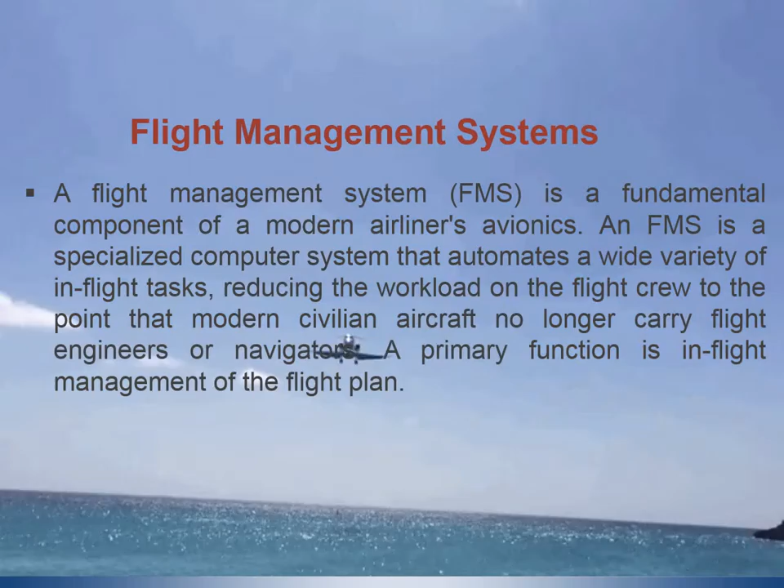Flight management systems play a vital role in aircraft management. A flight management system is a fundamental component of a modern airliner's avionics. An FMS is a specialized computer system that automates a wide variety of in-flight tasks, reducing the workload on the flight crew to the point that modern civilian aircraft no longer carry flight engineers or navigators. A primary function is in-flight management of the flight plan. This means the FMS provides area navigation which earlier was done by engineers and navigators. So the job done by navigators and engineers is now fulfilled by the flight management system, especially managing the flight plans.

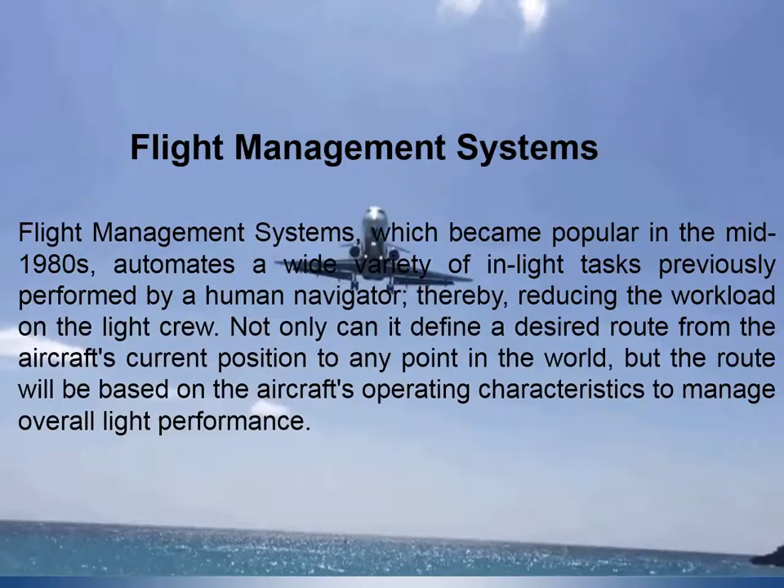Coming to other aspects of the flight management system, it became popular in the mid-1980s because it automates a wide variety of in-flight tasks previously performed by a human navigator, reducing the workload on the flight crew. Not only can it define a desired route from the aircraft's current position to any point in the world, but the route will be based on the aircraft's operating characteristics to manage overall flight performance.

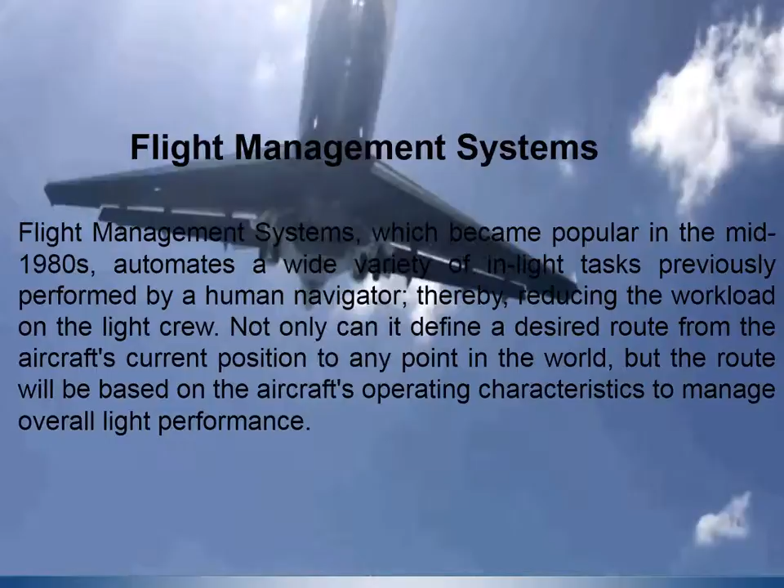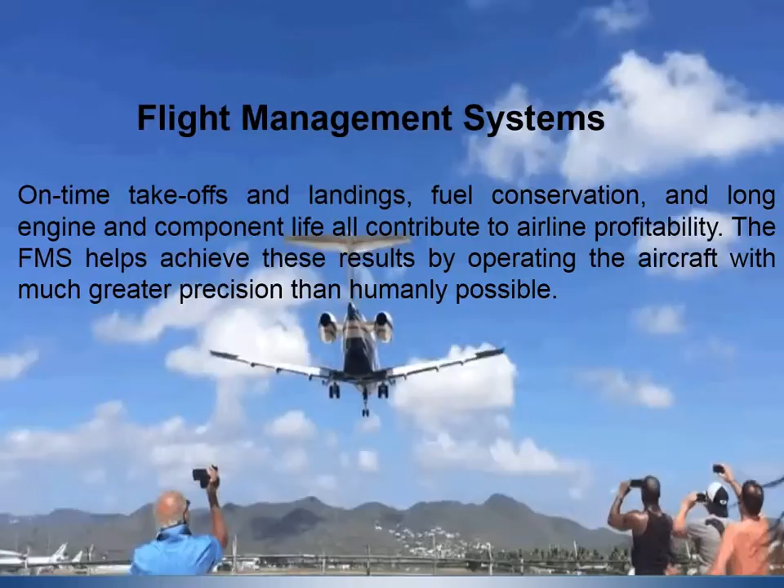Flight management systems provide very vital management, including on-time takeoffs, landings, fuel conservation, and long engine and component lives, all contributing to airline profitability. The FMS helps achieve these results by operating the aircraft with much greater precision than humanly possible. This means during flight, the aircraft flight management system approves the flight plan which is most profitable and economical for the airline.

Flight management systems consist of dual redundant flight management computers and control display units. These flight management computers are sometimes called FMCs, and control display units are called CDUs. During normal operation, the computers crosstalk with each other to share and compare information. Each FMC is capable of operating independently in the event the other FMC fails. However, only one FMC provides commands to the other aircraft systems at any one time.

This means we have dual redundant flight management computers, but at the same time, if both are working, they crosstalk with each other and find the accurate results. But at one moment, one acts as master and the other acts as slave.

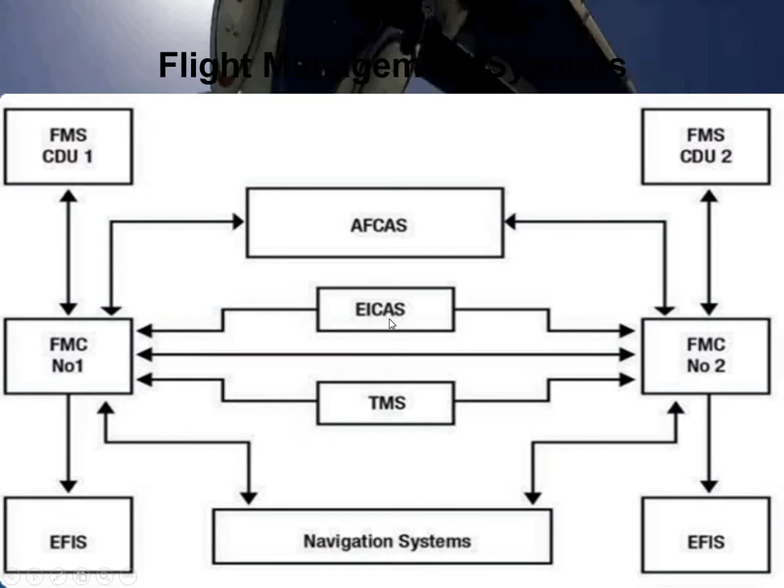At the same time, the FMC has a good interlinkage with the electronic engine indicating and crew alerting system, EICAS, and the thrust management system, and also the auto flight computer. So the FMCs provide interlink with the auto flight computer, engine indicating and crew alerting system, and the thrust management system of the engine. The augmentation of the auto flight computer, the EICAS, and the thrust management system is done on the basis of the flight management computer.

The fourth and major aspect of the flight management computer is its linkage with the navigational systems. These navigation systems provide and receive information from the flight management computer so they can give accurate flight plans and procedures, receiving and transmitting accurate flight plans to the flight management computer. These flight plans are executed by the FMC, but information comes from the navigation systems like VORs, ILS, TACAN, DMEs, and other equipment which provide navigational information to the aircraft.

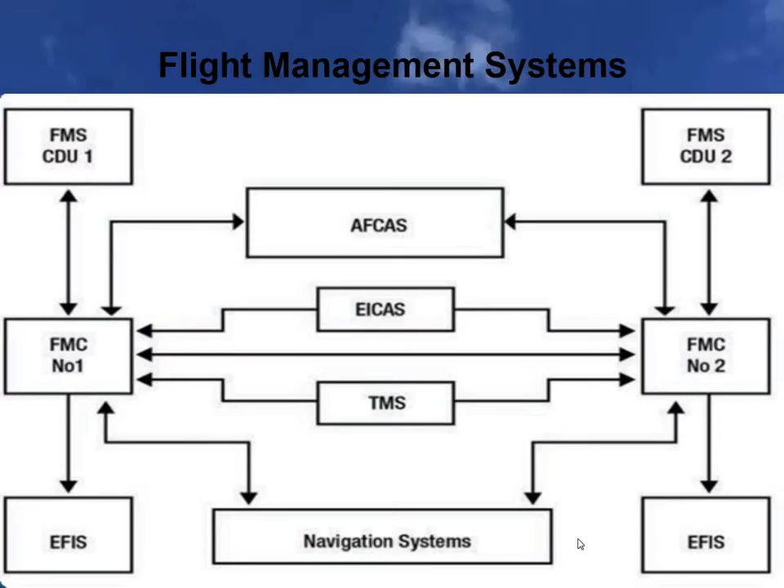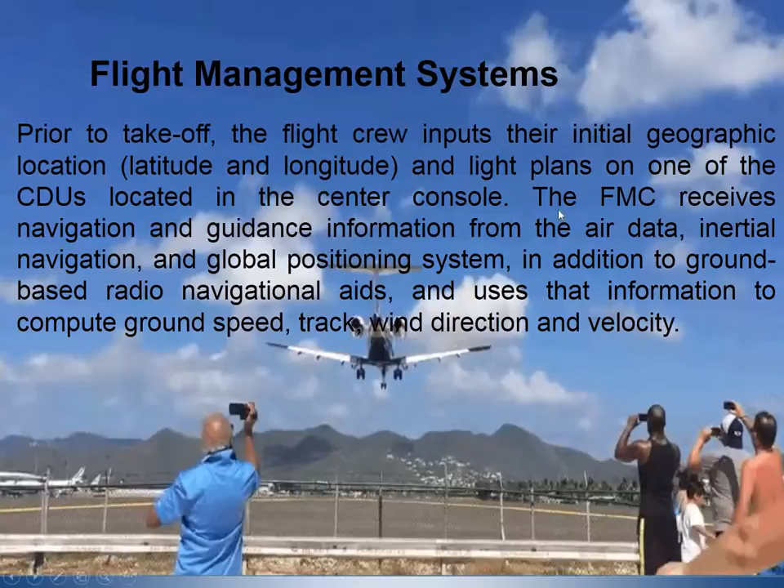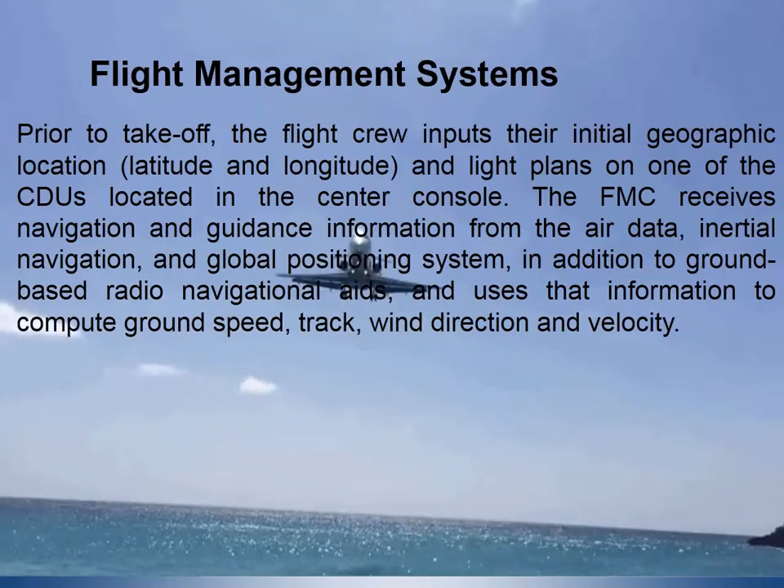Moving forward, prior to takeoff, the flight crew inputs their initial geographical locations - latitude and longitude - and flight plans on one of the CDUs located in the center console. The FMCs receive navigation and guidance information from the air data computers, inertial navigation computers, and global positioning system, in addition to ground-based radio navigational aids like VORs, and use that information to compute ground speed, track, wind direction, and velocity.

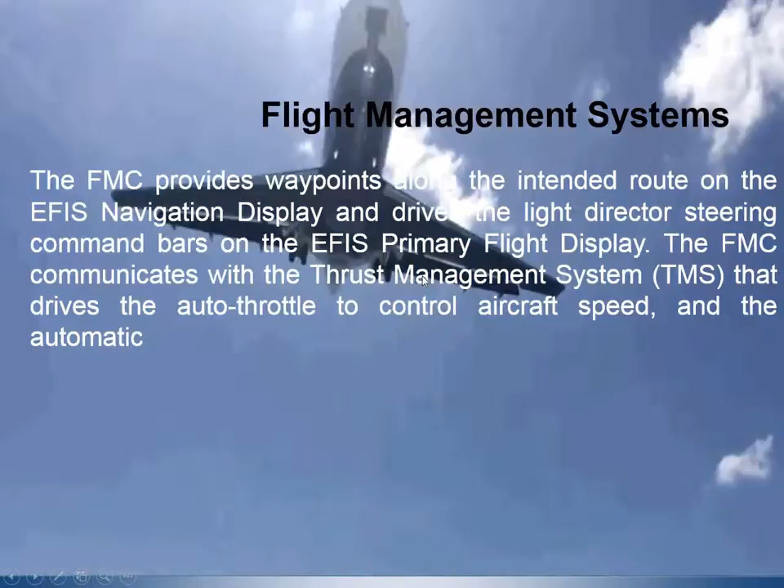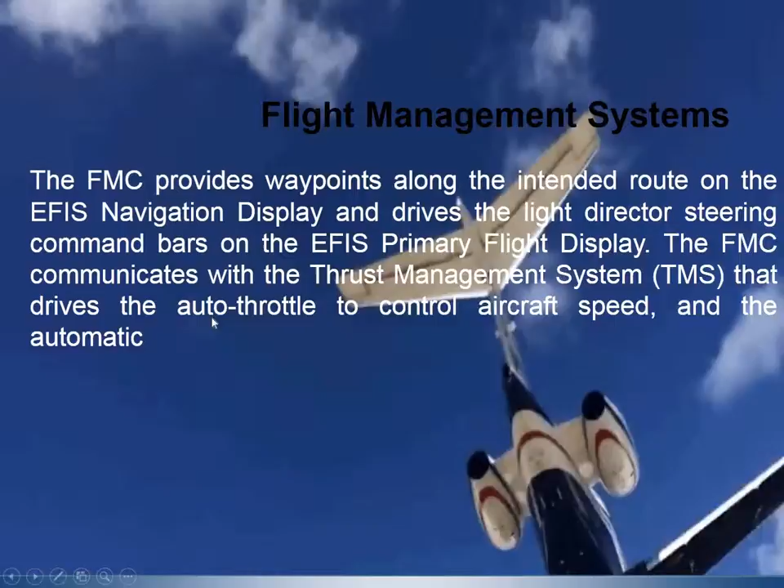The flight management system also provides waypoints along the intended route on the electronic flight instrument system navigation display, and drives the flight director steering command bar on the electronic flight instrument system, called PFD. The flight management computers communicate with the thrust management system, TMS, which drives the auto throttle to control aircraft speed and automatic thrust management.

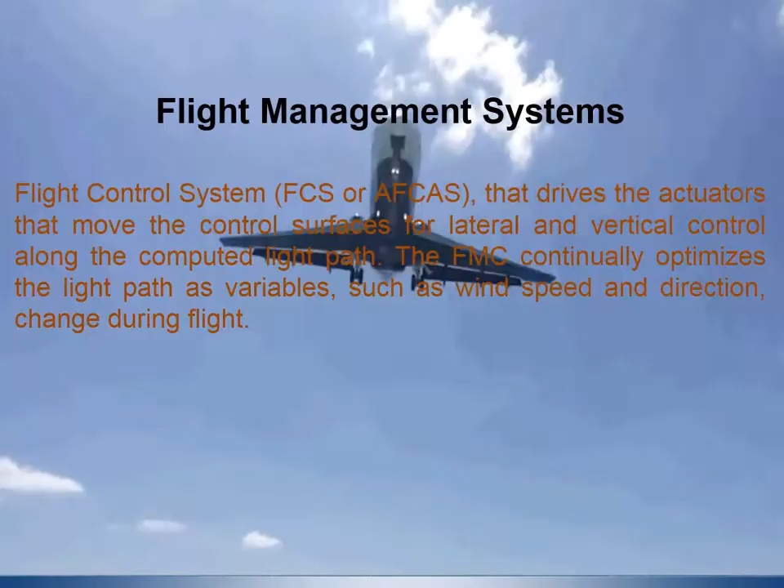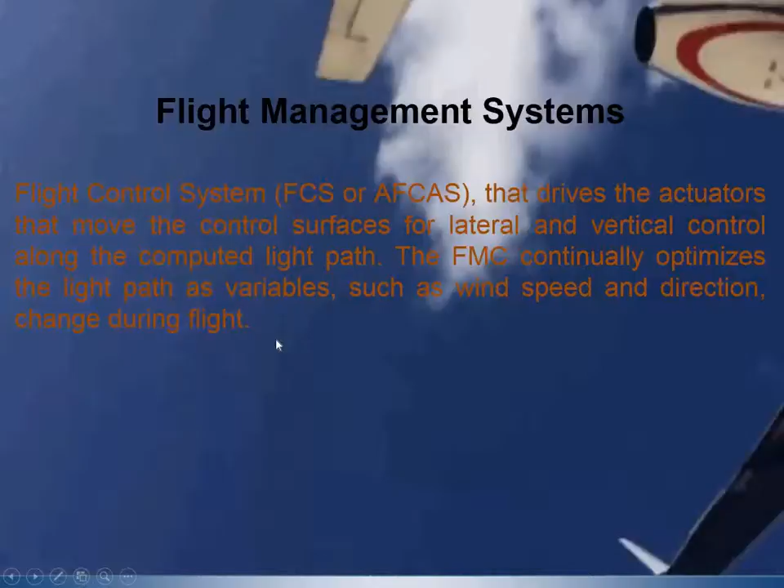Flight management systems also provide control for the flight control systems, or auto flight control augmentation system, that drives the actuators which move the control surfaces for lateral and vertical control along the computed flight path. The FMC continuously optimizes the flight path as variables such as wind speed and direction change during flight.

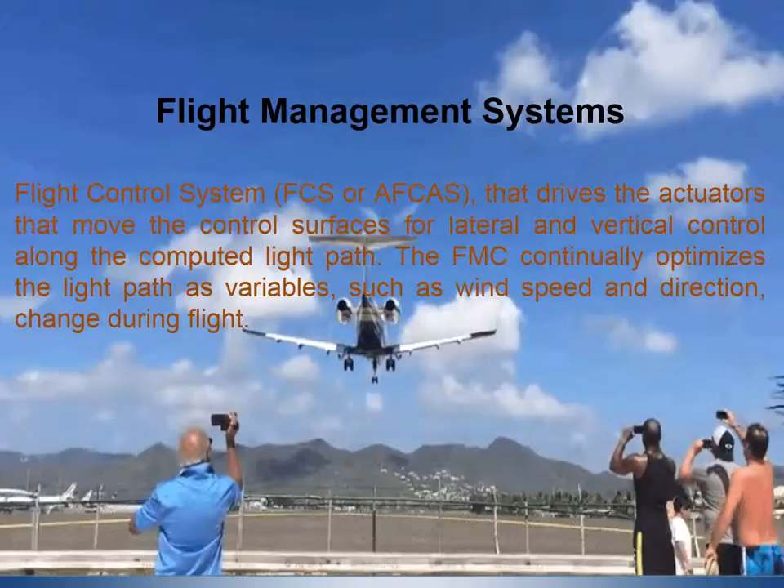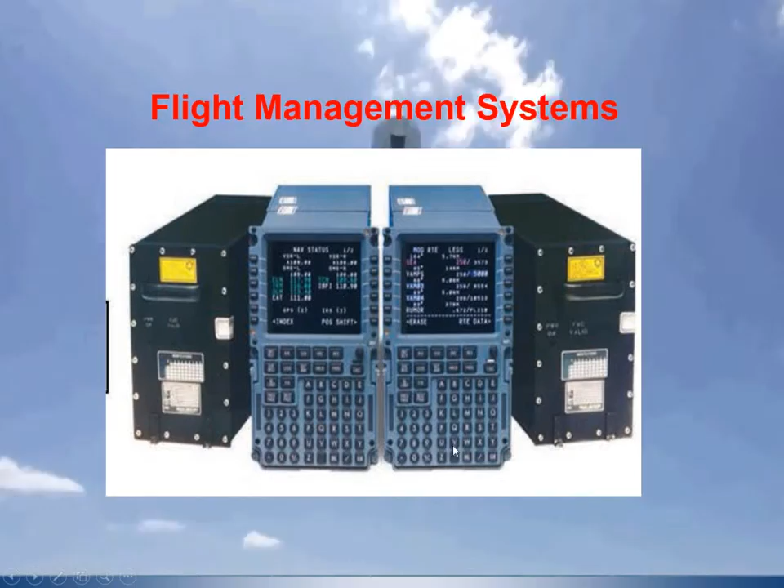The flight management system contains these LRUs: two flight management computers, and two CDUs.